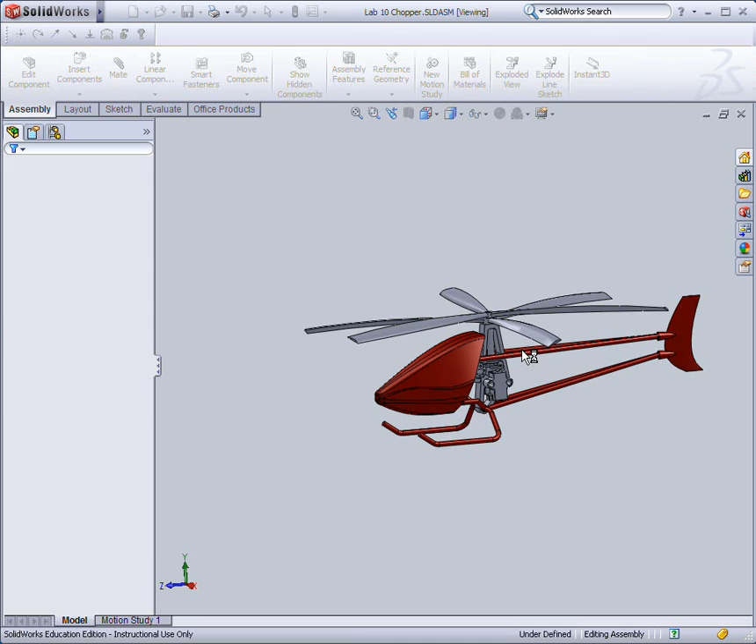Today you're going to make an exploded view of the chopper assembly that you did last week. In order to do that, we're going to go up, click Open, navigate to the directory that contains your chopper, and then go ahead and open the assembly. So your chopper assembly will be open. You can rotate it around a little bit, refamiliarize yourself with the model.

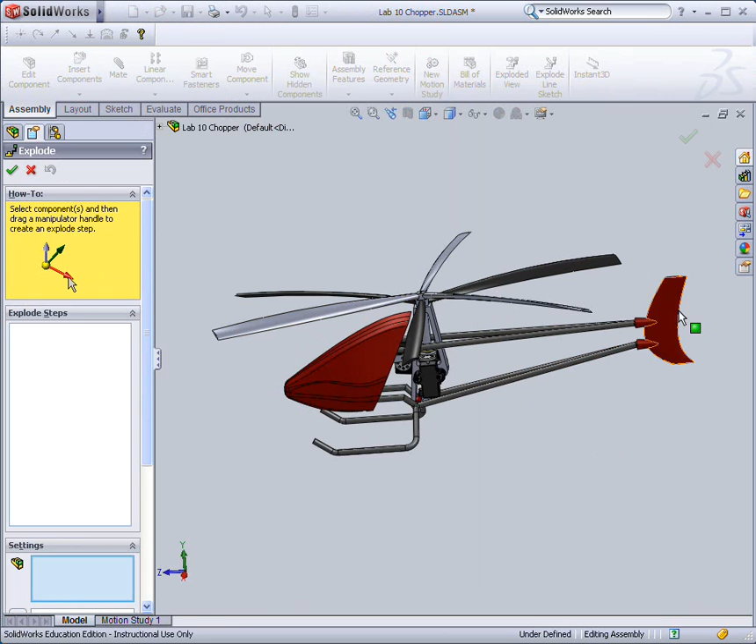And then we're going to create an exploded view. To do this, we're going to go up to Insert, Exploded View, and then we're going to select the parts we want to explode. The first part I'm going to pull off of the helicopter is the tail. So I'm going to click on the tail, and you'll see this triad open up, and I'm going to drag that back off the helicopter. So I've moved that back. I'll go up here, check OK.

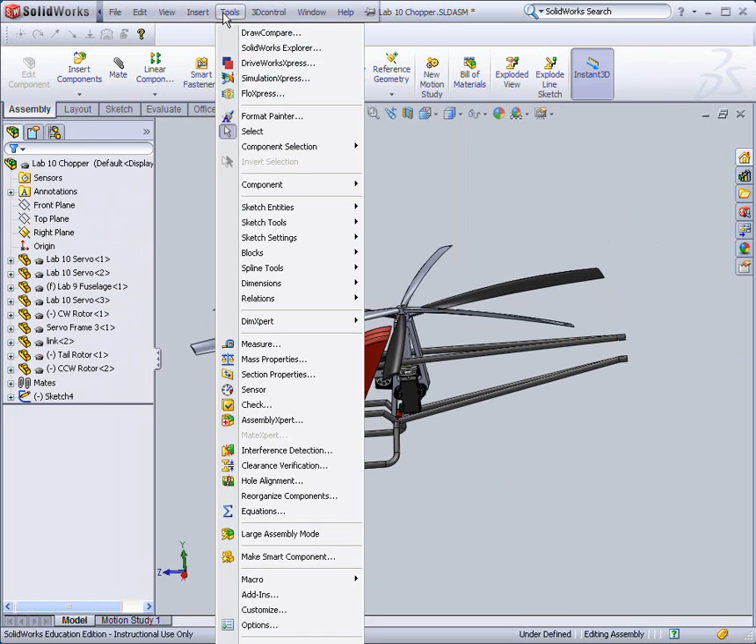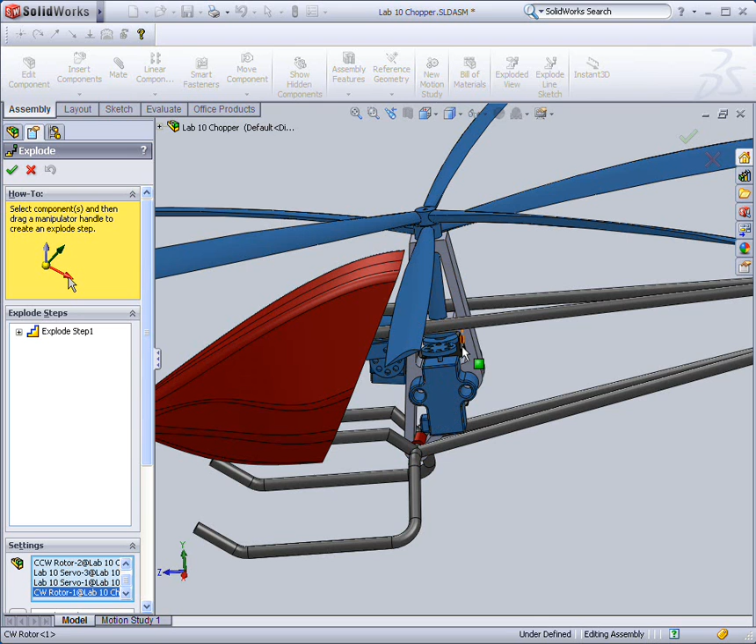If I want to keep adding exploded steps, I'd go back to Insert, Exploded View. And then the next thing I'm going to do is I'm going to pull the whole rotor servo assembly out of the center of the helicopter. So I'm going to select each component, and they'll all highlight. And then those I'm going to drag straight up. Once it turns purple, it'll move on to the next explode step.

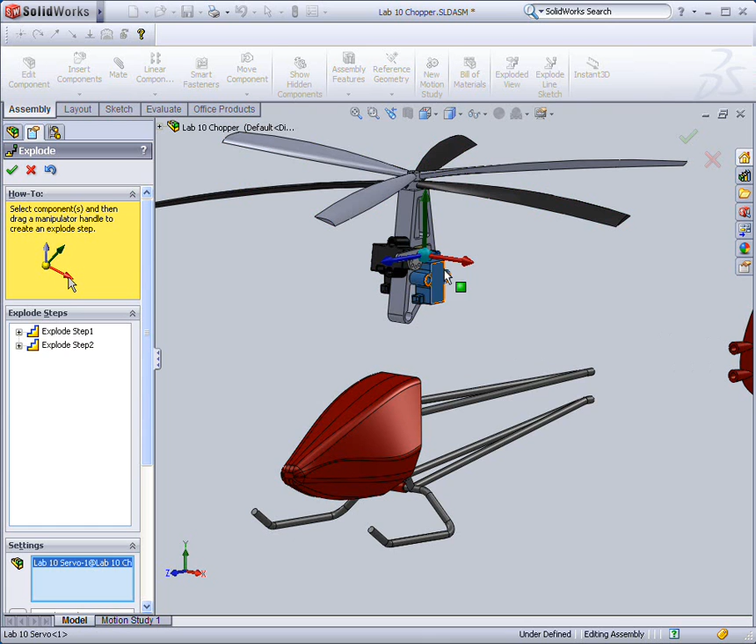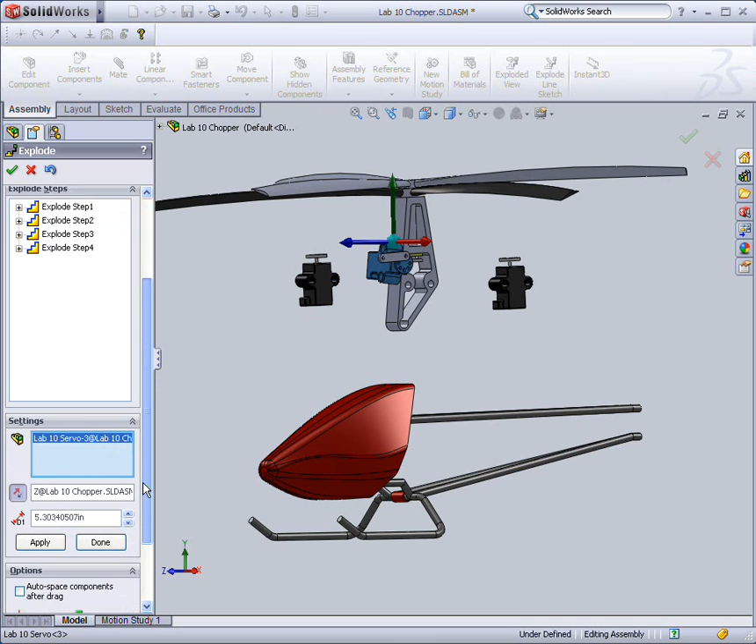So now I want to pull this motor off the side. So now that one's selected, and I can bring it off to the right. And if I click on this one, I'll drag that one off to the left. If I want to change direction of the triad, I can pick the part, and then over here at the left, this indicates that I'm going in the Z direction. If I click on that, I can select a plane, and it'll move one of the parts of the triad to line up with that plane. So that'll let me bring this motor off forward.

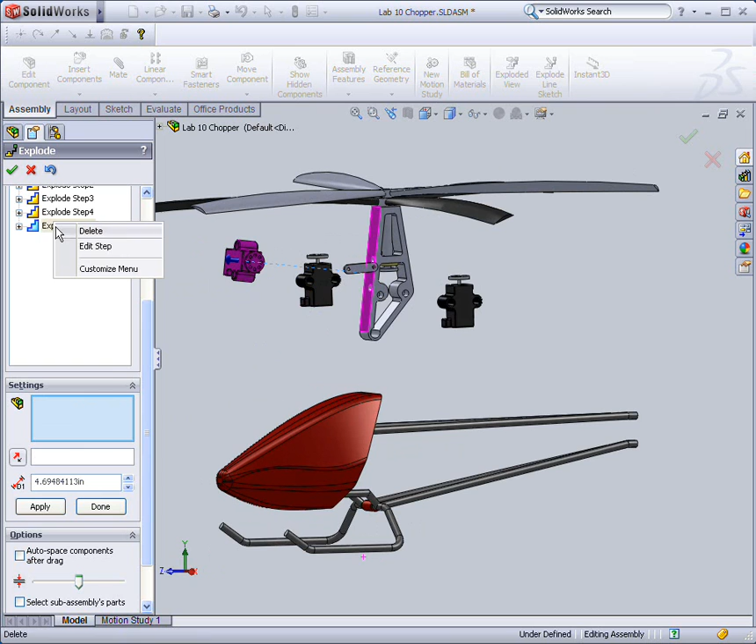Now if you notice, I forgot to add that link to it. I want to bring that link with it. So if I go up here and go Edit Step, and then select this part and click Apply, I can move both of them forward. So if you forget a part, it's no big deal. That actually happens a lot. You'll move something and an internal washer or bearing will stay in place because you didn't select it, because you couldn't see it in an assembly with hundreds of parts.

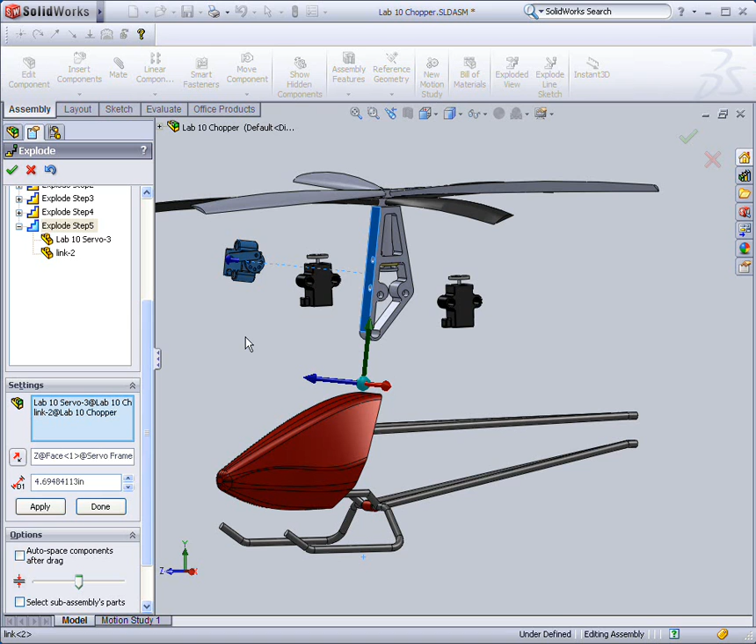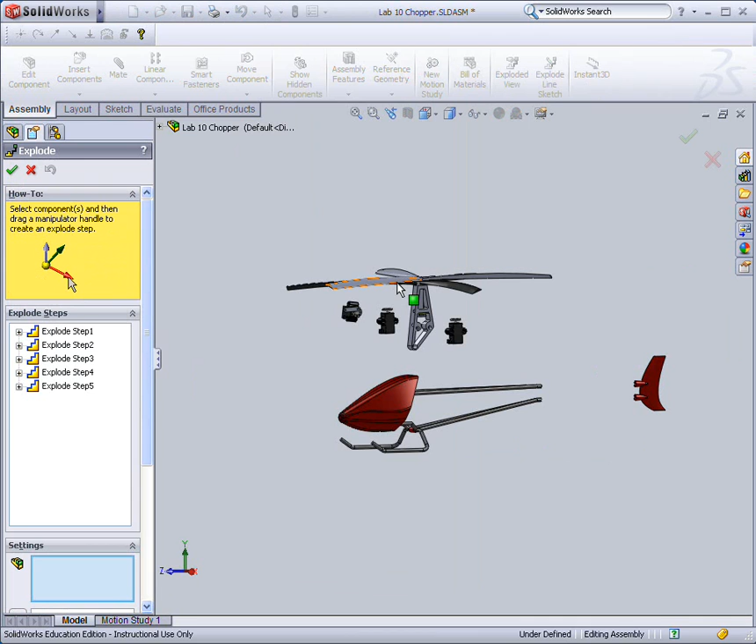So the next one, I'm going to pull apart the rotor assembly. So I'm going to grab the top rotor, and actually I'm still editing, so I'm going to delete that, click Apply, and then check OK. And I'll go back in and bring the rotor assembly up. I'll bring the whole thing up. It's generally better to pick any part that you're going in the direction. Each time you move, pick the parts that you want to continue moving. And then I'm just going to grab the top blade and pull that one up a little bit further.

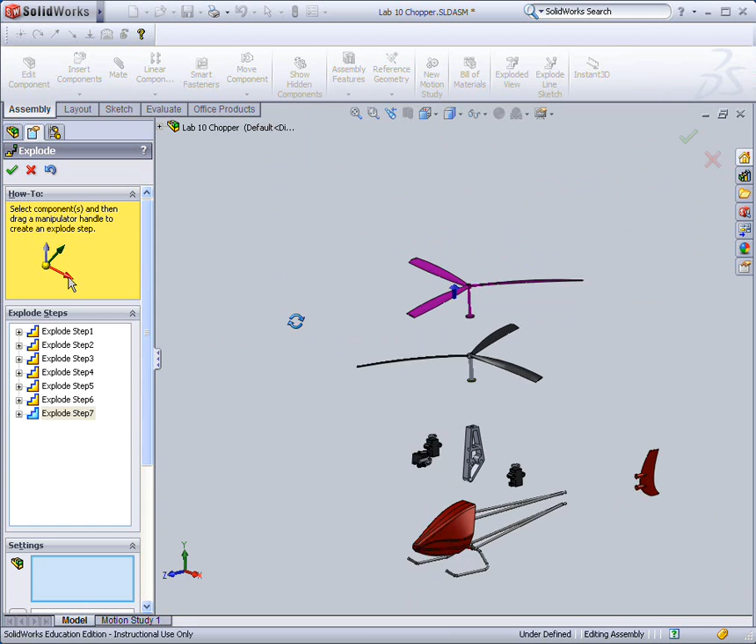So now I've got one last thing that I want to do. I'm going to bring that link off over to the side and check OK one last time. And there's my exploded view. So these are very useful for parts diagrams and for explaining how your assembly goes together. You've probably seen diagrams like this with assembly instructions for toys or machine components that you've worked on.

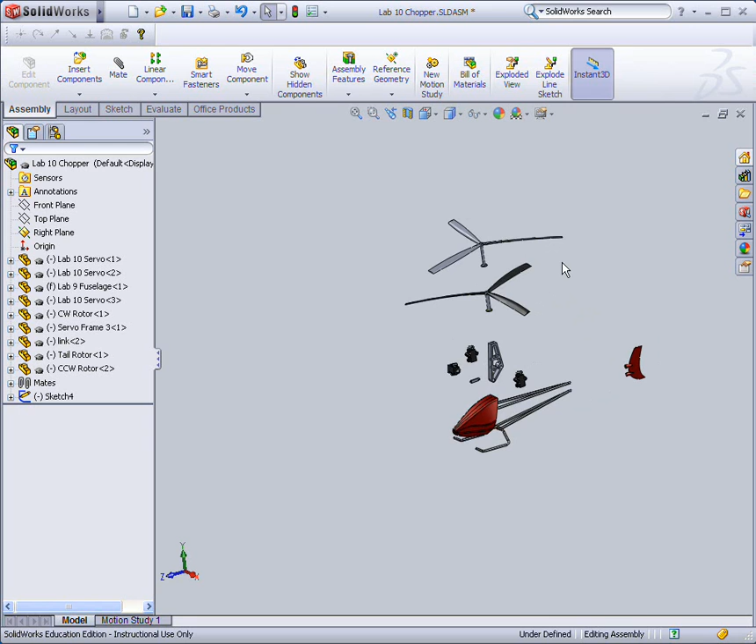Now, once we have it exploded, the other thing that we would want to do potentially is bring it back together. So we can go up and right-click on the main assembly in the feature tree and select collapse. And that'll bring it back down together. If you want to explode it, you can go up there and go down to explode, and that'll show the exploded state.

Another thing that happened to me in industry is one time somebody who was working with an assembly didn't know how to collapse it, and they actually sent an entire portion of an engine assembly in its exploded view state. So I had to go in to the model and put it all back together.

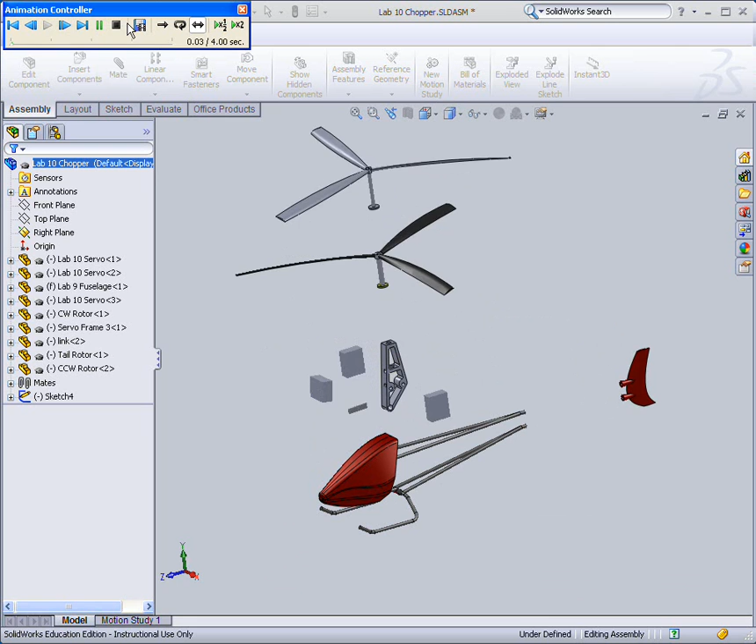Okay, the other thing that's up here is a nifty tool called Animate Collapse. So if we select Animate Collapse, it brings all of those steps in together. And if you notice, you have an animation controller up here. You can have it reciprocate, so it'll take it apart and put it together. Now it may cause errors. These happen when the graphics card gets overloaded. So the first one worked okay with that. And if I stop it, move it around a little bit, that brings those back.

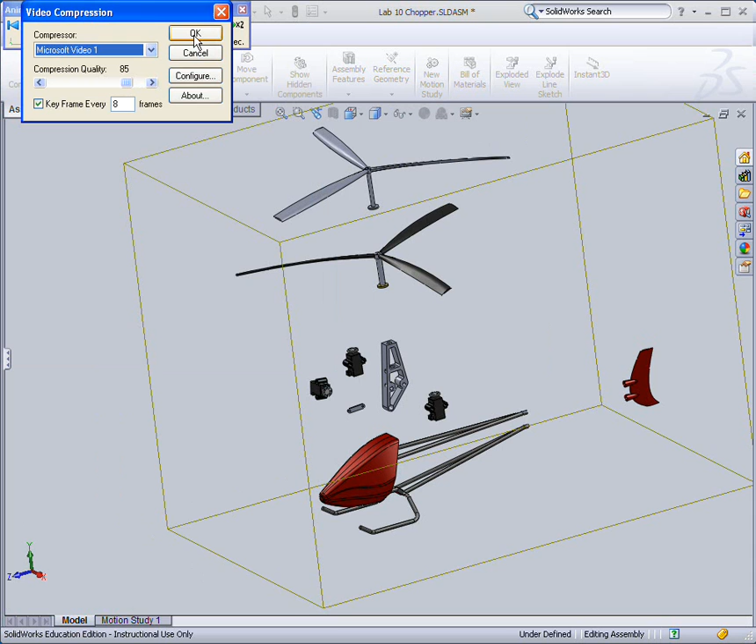The other thing that we can do is we can save that animation. So we can save this as an AVI file, and you don't need to mess with these settings at all, but SolidWorks gives you these options. You can click OK, and that creates an AVI in your directory. So hopefully that will play on our machines in the lab, but that basically generates that for the component.

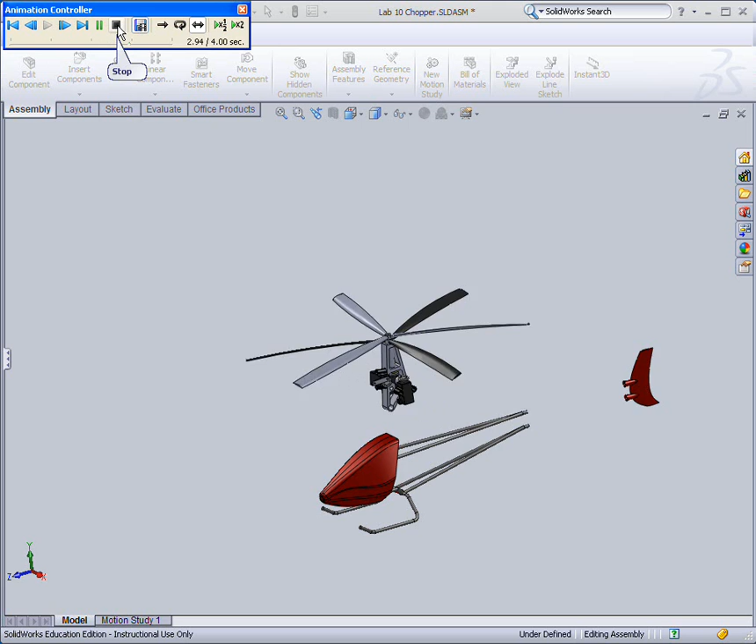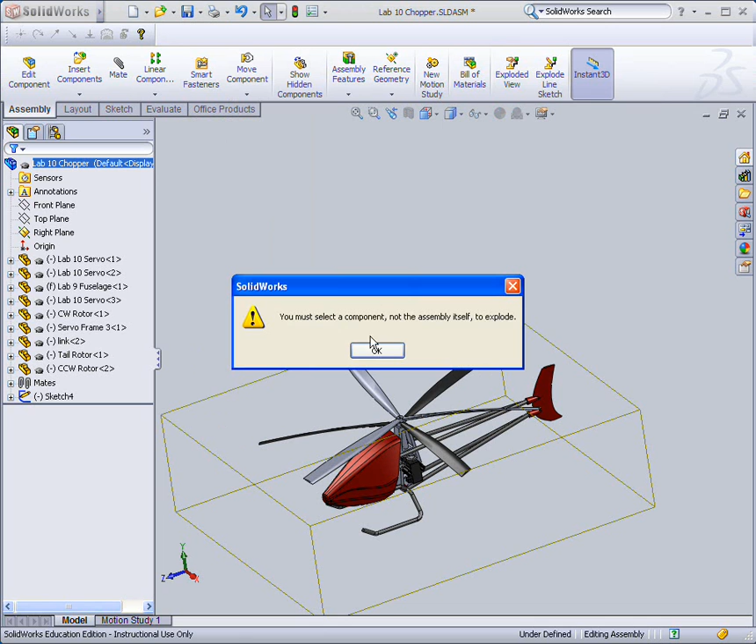So if you add more components, you can continue to explode them. You can also go back in. If you close out of the animation controller, you can go into Insert Exploded View. And over here, you can just add as many steps as you want if you wanted to further disassemble your part. So your first sheet for Lab 10 will have a single exploded view on the sheet of the helicopter.